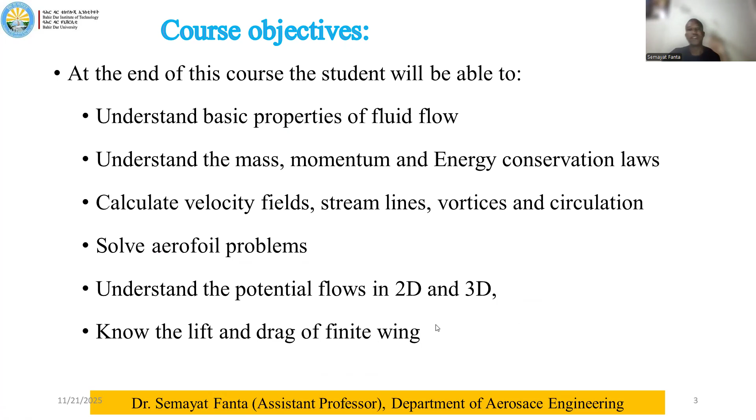The content of the first chapter of this course contains the introductory part, the history of aerodynamics, the aerodynamic force and moments, the aerodynamic coefficients (non-dimensional coefficients of aerodynamic force and moment), the pressure center, the aerodynamic center, and the governing differential equations for continuity, momentum, and energy. On that, the Euler equations and the Navier-Stokes equations will be discussed.

Also covered: the streakline, streamline, and pathlines of the flow, angular velocity, vorticity, and strain, circulation, stream function, velocity potential, the relation between the stream function and the velocity potential, the pressure and velocity distribution on bodies, various aerodynamic properties, and pressure, density, velocity, and the Mach number or sound speed, which are part of this discussion.

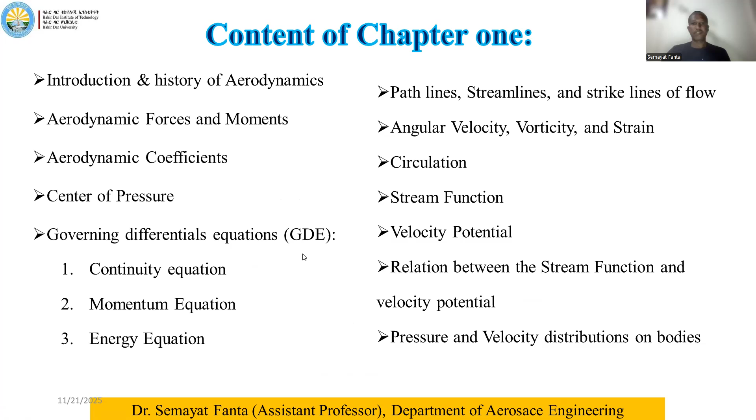So let's directly start from the definition of aerodynamics. Aerodynamics is the study of motion of air and the force acting on bodies moving through the air. These bodies moving through the air may be an aircraft, a missile, or a rocket, or racing cars and others.

It is just a study of the behavior of air as it interacts with solid objects such as an airplane wing, a car, or buildings. So aerodynamics is a branch of science and engineering that deals with the study of how gas particles, particularly air, interact with moving objects.

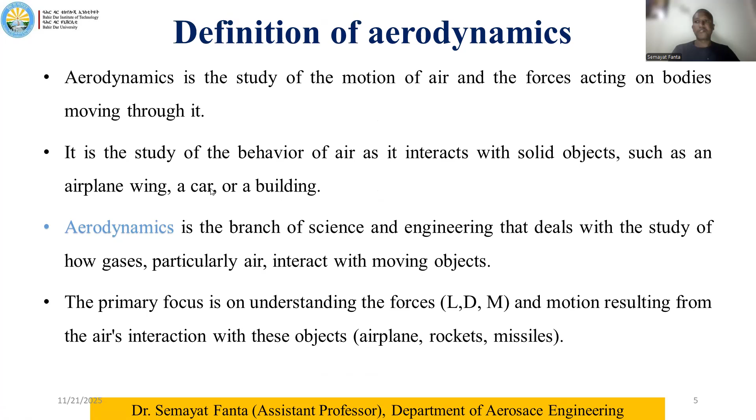The primary focus is understanding forces like lift, drag, moment, aerodynamic force, and the motion resulting from air interacting with these objects like airplane, rocket, missile. Because of that, aerodynamics plays a crucial role in the design and performance analysis of aircraft and automotives.

The fundamental concept in aerodynamics is just airflow. When an aircraft moves through air, it experiences the effect of fluid motion. This interaction between the aircraft and the air generates force that affects the aircraft's motion.

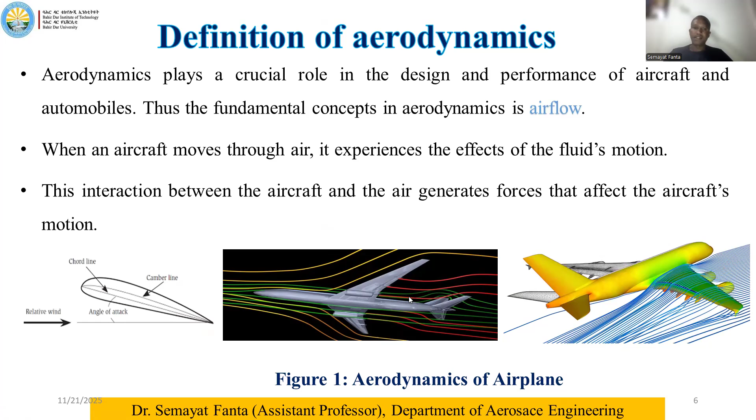From Figure 1, what you can see is the interaction between the moving fluid, the aircraft which moves through the air, and how the air interacts with the aircraft wing. This is a CFD simulation showing how the air interacts with the aircraft. So aerodynamics are generally concerned with one or more of the following.

One is external flow aerodynamics, and another is internal flow aerodynamics. In the case of external flow over a body, it is the prediction of force, moments, and heat transfer on objects moving through fluid, the fluid being air here. That is the state of external flow over the body.

Another one is internal flow through the body: the determination of fluid flow characteristics within ducts or within enclosed passages. That is called the state of internal flow through the body.

The dynamics of both liquid and gas are studied under the general topic called fluid dynamics. So fluid dynamics is subdivided into hydrodynamics, gas dynamics, and aerodynamics. Our main concern is on aerodynamics, that is the flow of air.

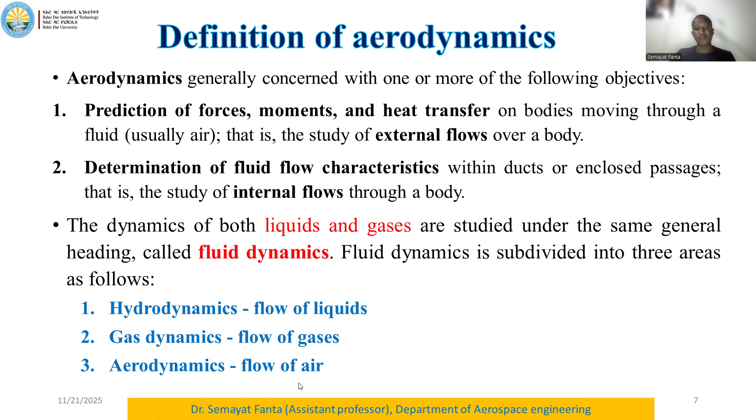Basic principles of aerodynamics are the fundamental principles derived from the laws of fluid mechanics and thermodynamics. These principles help explain how lift, drag, and other aerodynamic forces are generated and how air behaves around moving objects such as aircraft, vehicles, or projectiles.

The basic principles are the principle of continuity or conservation of mass, Bernoulli's principle or conservation of energy, and Newton's second law or conservation of momentum. These three are the basic backbone of the study of aerodynamics.

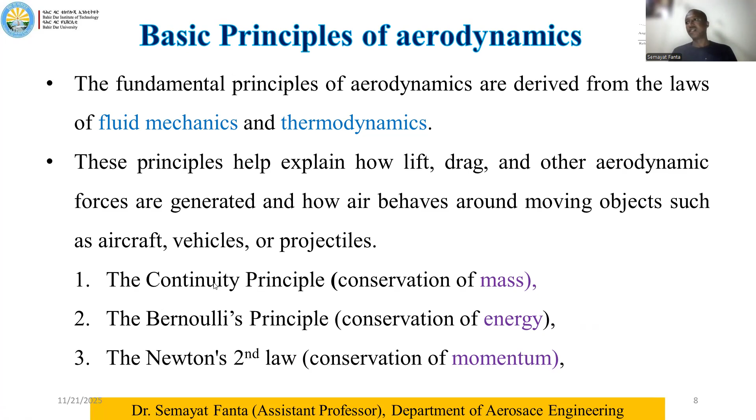We will derive the formula for each case, in the case of incompressible flow as well as in the case of compressible flow. But in the first part of aerodynamics, the compressibility of the fluid is not considered, so our fluid is incompressible fluid.

So when we come to the continuity equation or principle, it is based on the law of conservation of mass. It states that for a steady flow, the mass flow rate of air must remain constant from one cross-section of a stream tube to another. So the mass flow rate, dm over dt, which is equal to rho AV, is constant. On the stream tube, we can observe the flow from one point to another, which is considered constant, where rho is density, A is the cross-sectional area, and V is the flow velocity.

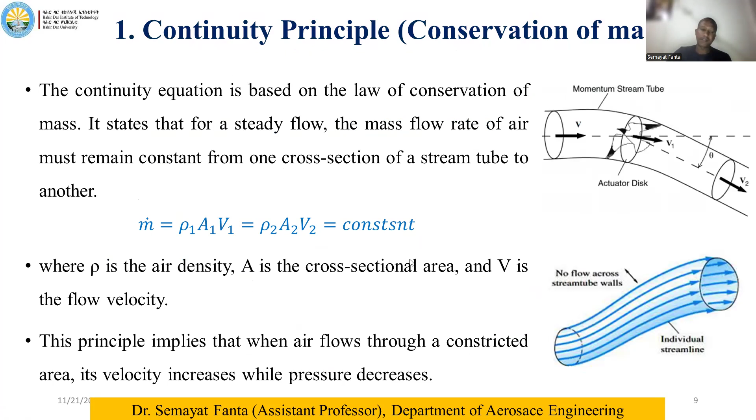This principle implies that when air flows through a constricted area, its velocity increases while pressure decreases. This is called the conservation of mass, or mass flow principle. The second principle is Bernoulli's principle, which expresses the relation between the pressure, velocity, and the height or elevation in an inviscid incompressible flow.

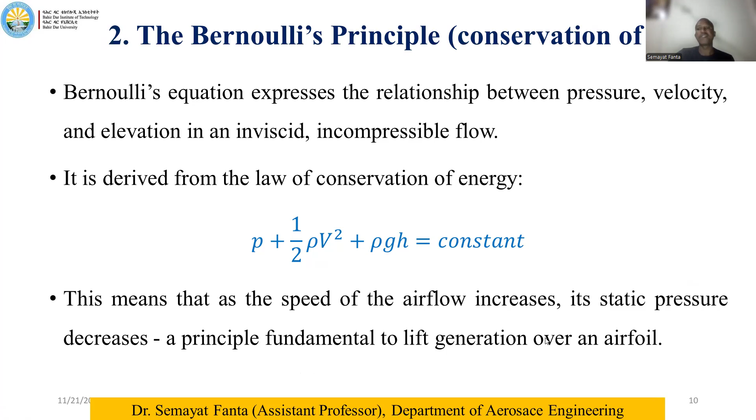It is derived from the law of conservation of energy, that is, the pressure energy plus kinetic energy plus the potential energy is considered constant. So P plus half rho V square, where half rho V square is dynamic pressure, and rho GH is the potential pressure, which is considered constant. This means that as the speed of the airflow increases, its static pressure decreases. This principle is fundamental to lift generation over an airfoil. So this is the explanation of Bernoulli's principle, or energy principle.

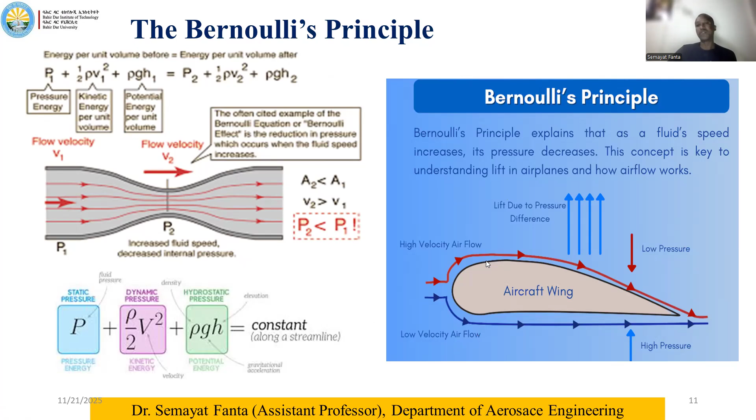So in Bernoulli's principle, it explains that as fluid speed increases, its pressure decreases. This concept is key to understanding lift in airplanes and how airflow works. So this is the lift generation: there is high velocity airflow at the top of the aerofoil and low velocity airflow at the bottom. Consequently, high pressure develops at the bottom and low pressure develops at the top, so that the differential pressure helps lift the aerofoil upward. That is Bernoulli's principle.

Newton's three laws are also an important component for the study of aerodynamics. The first law states that a body remains at rest or in uniform motion unless acted upon by an external force. This represents two important equations: one is an object at rest, that means a static condition, and the other case is uniform motion, which indicates that the velocity is constant, that the rate of change of velocity is zero, meaning acceleration is zero. So static and dynamic equilibrium conditions.

The second law is that the force on a body is equal to the rate of change of its momentum, that F equals dmv over dt. F is equal to mass times acceleration, so the force F is equal to dmv over dt form of equation. Aerodynamic forces such as lift and drag arise due to the pressure and shear stress distribution on the surface of the body, which are helpful in the analysis.

The third case is the action and reaction law. For every action, there is an equal and opposite reaction, equal in magnitude and opposite in direction. So the lift produced is as the air is deflected downward by the wing, resulting in an upward reaction force. The downwash and the lift creation are opposite. That is the third law principle, which is related to lift.

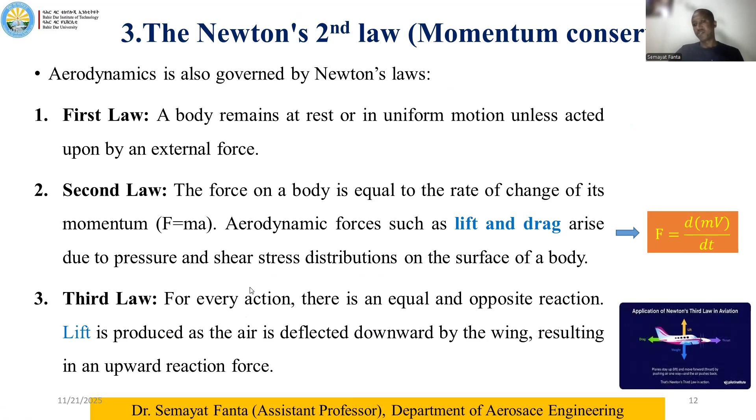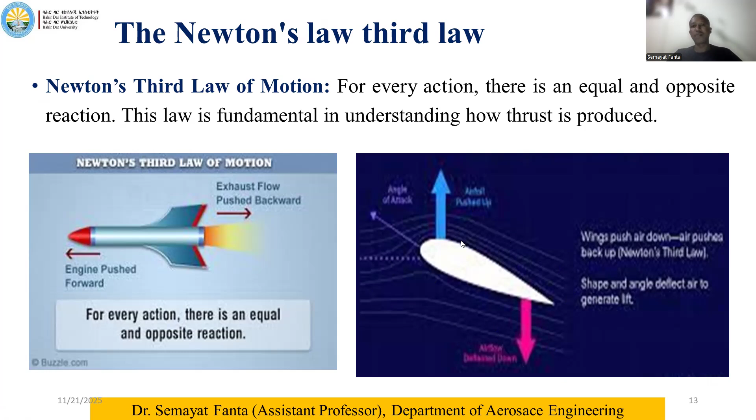Here also, the deflection of moving air downward creates downwash, and that action creates the reaction that moves the object upward. So that is also an opposite force.

Viscosity and boundary layer theory are also an important part of aerodynamics. Viscosity is the fundamental property of fluid that describes its internal resistance to flow or deformation. Due to the presence of viscosity, shear force distribution happens on the aerofoil. Viscosity measures how easily one layer of fluid slides over another. When a fluid flows, adjacent layers move at different velocities, creating a velocity gradient.

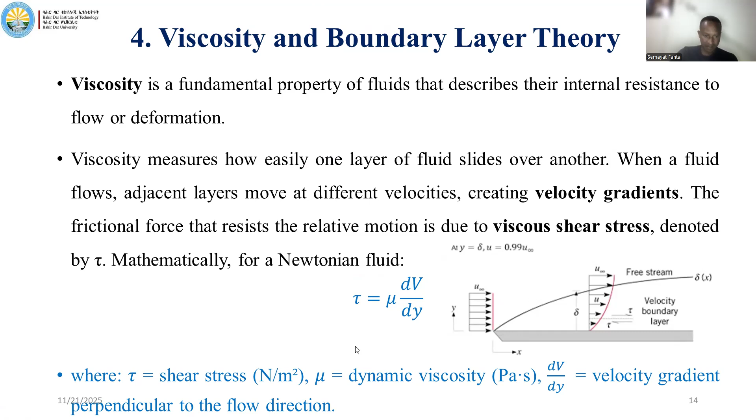One of the fluid layers is considered stationary, and the top is considered movable. From that, we can get the shear force. The velocity gradient perpendicular to the flow direction is given by dv/dy.

Viscosity arises from molecular interaction within the fluid. For gas, viscosity increases with temperature because of rising molecular activity, while for liquid, it decreases with temperature due to reduction in cohesion between molecules.

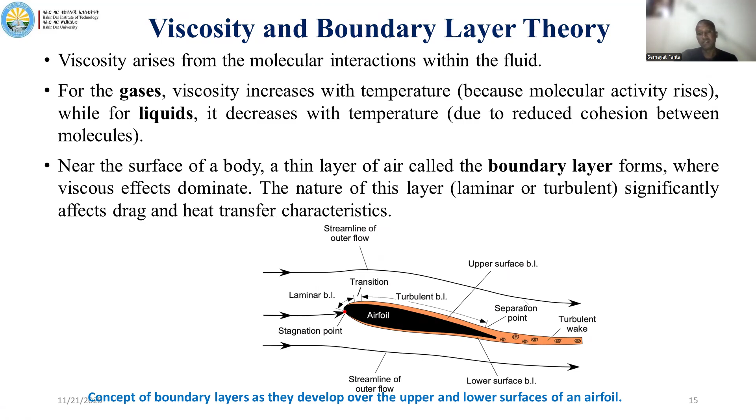This is explaining the boundary layer. The nature of the layer, laminar or turbulent, significantly affects drag and heat transfer characteristics. We have laminar boundary at the initial stage, then a transition somewhere, and then turbulence. At high speed, we can observe a turbulent wake, which contributes to flow separation over the aerofoil.

Now that we've discussed these issues, let's come to the four fundamental forces of flight. In aircraft flight, we encounter four important forces. One is lift, which suspends an aircraft in the vertical upward direction. Another is drag, which is the resistance or opposite force to forward motion. Thrust is the force that enables an aircraft's forward movement, propelling the object forward. And weight is the resistance due to gravitational attraction, which acts through the center of gravity of an object. These are the four forces.

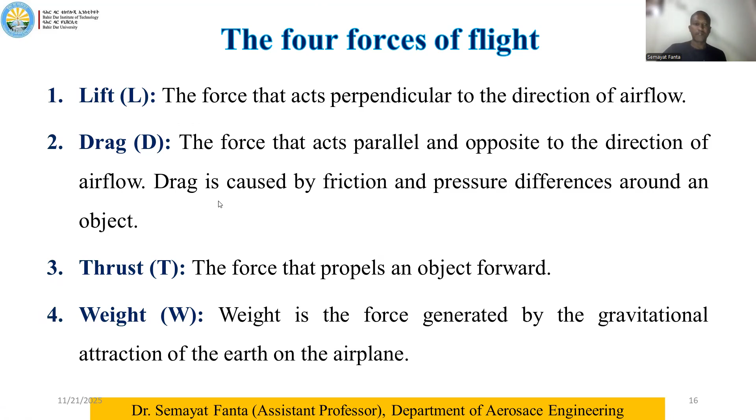The aerodynamic forces are lift and drag, which are important aerodynamic forces. Thrust is the engine force produced from the engine, and weight is the summation of the component acting downward. So these are the four forces.

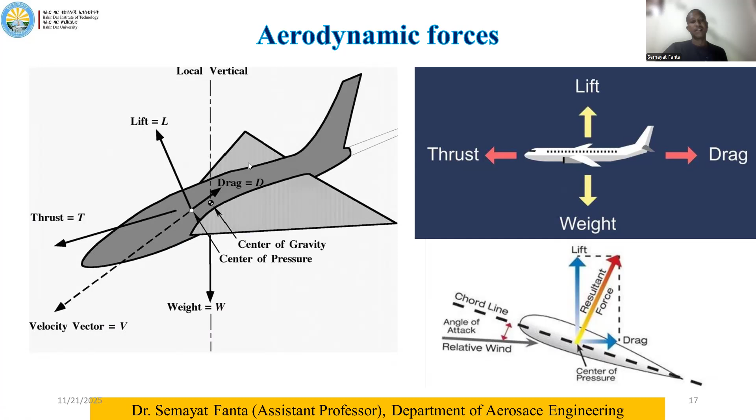Lift and drag, these aerodynamic forces, act through the center of pressure, but the weight acts through the center of gravity. So weight acts through CG, and lift and drag act through the pressure center. Thrust is in the direction of motion, but the velocity vector and thrust vector may not coincide - it may create some small angle, which will contribute to the performance equations of the force summation equation.

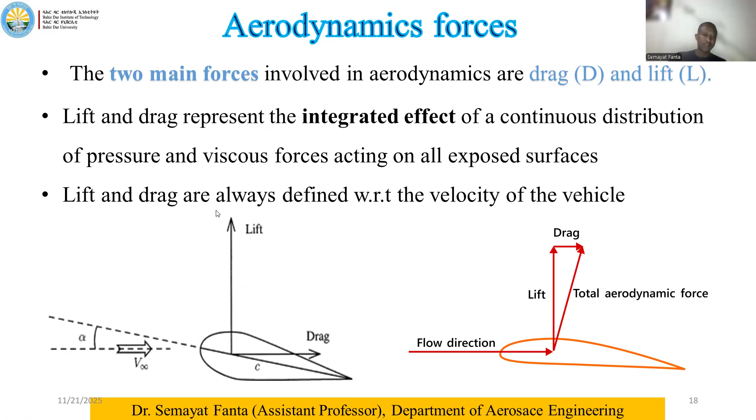The two main aerodynamic forces are the drag force and the lift force. Lift and drag are the integrated effect of continuous distribution of pressure and viscous force acting on all exposed surfaces of the object, and they are always defined with respect to the velocity of the vehicle. So this is the lift, and the drag component is in this direction, giving a total resultant aerodynamic force, which acts through the center of pressure, and drag is opposite to the flow direction.

We can mathematically express lift as half rho v square S CL. Here, rho is the density of air at a given flight altitude, V is the flight velocity, S is the planform area of the wing, and CL is the lift coefficient, the non-dimensional aerodynamic lift coefficient, which we will discuss further.

Lift is an upward force generated by the flow of air over the surface of an object. It is responsible for enabling flight and counteracting the force of gravity. Lift acts perpendicular to the direction of gravity, allowing an object to rise and remain airborne.

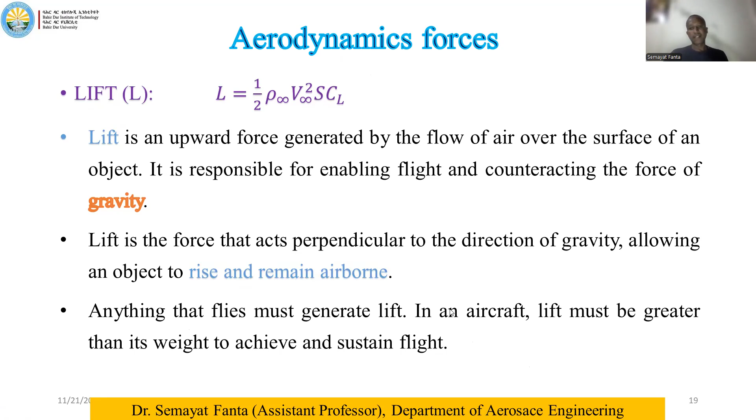Anything that flies must generate lift. In an aircraft, lift must be greater than weight to achieve and sustain flight. At a particular condition, lift equals weight and thrust equals drag; this condition may occur at the maximum altitude where the aircraft is cruising, at constant velocity and constant altitude. But in most cases, this criteria must be satisfied to make the flying object airborne.

Different aircraft use various mechanisms to generate lift, and airplanes rely on the shape of their wings, which are curved on top and flat on the bottom. One type is symmetric aerofoil and another is cambered aerofoil, and cambered aerofoils are intentionally made for this purpose. These shapes cause air to flow faster over the top, creating lower air pressure, and higher pressure underneath, and the resulting pressure difference generates lift, as we have discussed.

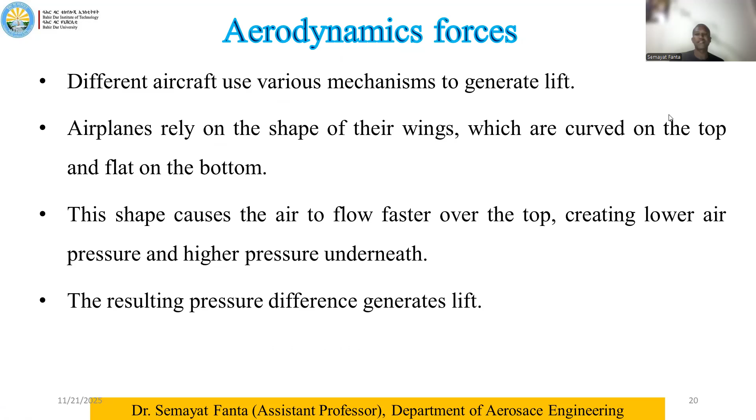The second important aerodynamic force is drag force, expressed as half rho v square S CD. The difference is that here it is CD, the non-dimensional drag coefficient, instead of CL, the non-dimensional lift coefficient. These interact with each other through the drag polar equation: CD equals CD naught plus K CL square, and we will see how they relate to each other.

Drag is the resistance force experienced by an object as it moves through a fluid, acting opposite to the direction of motion and tending to slow the object down. Knowing and minimizing drag is a crucial issue for aeronautical or aerospace engineers and designers. Our main intention is to minimize drag and maximize lift, and for that, a number of design philosophies are required.

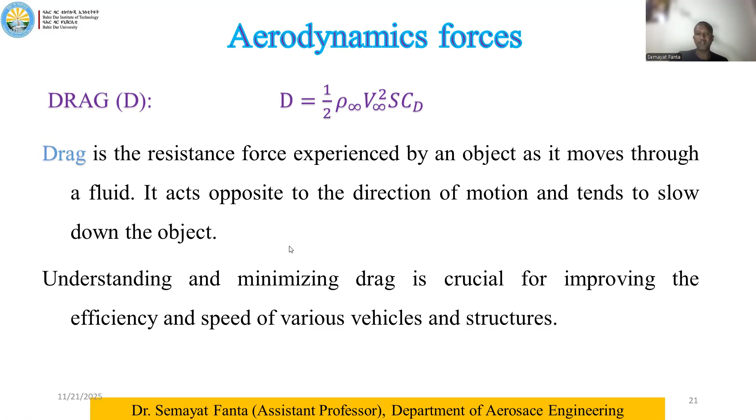These are the various classifications of drag. In the drag polar equation, CD equals CD naught plus K CL square, CD naught is the parasite drag, and K CL square is the induced drag component. The parasite drag is further classified into three types: friction or form drag, interference drag, and wave drag. Wave drag is due to the generation of shock waves, and friction or form drag is further classified into skin friction, pressure drag, and profile drag.

Interference drag is also classified, including interference drag due to intersection geometry, because most aircraft components, like the wing attached to the fuselage, landing gear or undercarriage systems situated in the fuselage, and tail sections attached to the fuselage, create points where components intersect. At these intersection points, we get this intersection geometry drag, or interference drag.

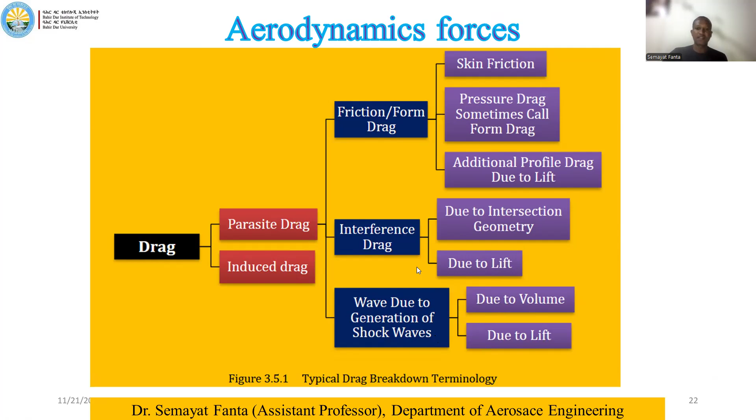Drag due to lift, that is CL square, comes from this point. Wave drag is also categorized into drag due to volume and drag due to lift. So these are some classifications: parasitic drag, CD naught, which includes form drag, skin friction, and interference drag.

Induced drag, also known as lift-induced drag, CDI, is one part of total drag. CDI is equal to K times CL squared, where K is defined as 1 over pi times aspect ratio times Oswald efficiency factor. So CDI equals CL squared over pi, AR, and E.

Aspect ratio itself is defined as the ratio of wingspan squared over wing planform area. So aspect ratio equals B squared over S.

Wave drag is the third type of drag, occurring when an aircraft approaches a speed near Mach 0.82. This is sometimes called the drag divergence Mach number. As the aircraft approaches that speed, shock waves form, and due to that it is called wave drag.

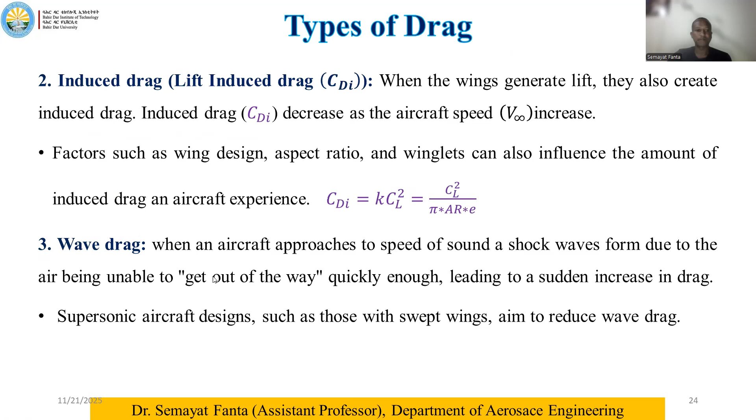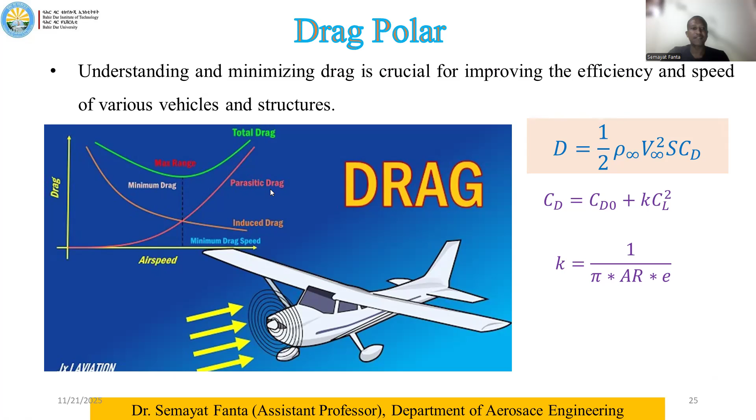The total drag is known as thrust required. So knowing the drag means knowing the thrust required also. To determine the thrust, we have to determine the total drag.

Thrust is another force, from the four forces of flight. Thrust is the force that propels an object forward, and it is the opposite force to drag, necessary to overcome drag and maintain forward motion. In aviation, thrust is generated by a jet engine, or from a propeller, or from various propulsive mechanisms.

Larger aircraft like Boeing and Airbus use jet engines, but smaller aircraft like Bombardier and Cessna may use propellers to propel the aircraft forward. The thrust equation is given mathematically as m-dot times ve, plus (p minus pa) times ae.

The first part of the thrust equation is called the momentum thrust, and the next part is the pressure thrust. The momentum thrust uses m-dot, the rate of mass flow, and ve is the exit velocity. P is exit pressure, pa is atmospheric pressure, and A is exit area. This form of the equation applies for rocket models.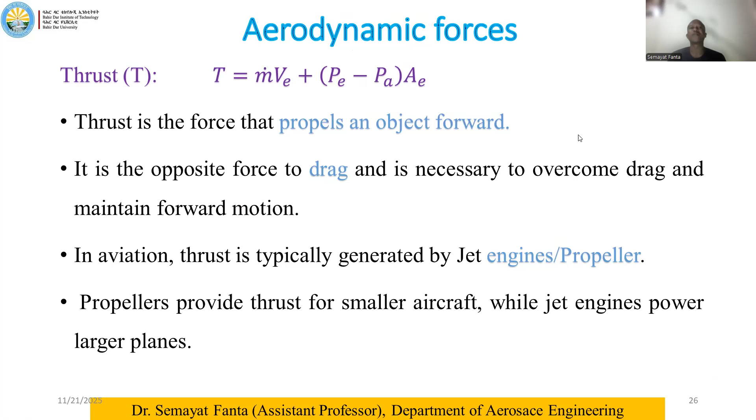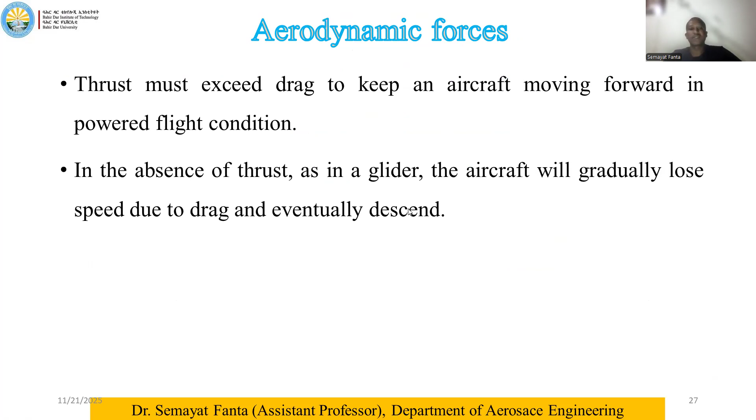Thrust must exceed drag to keep the aircraft moving forward in powered flight, except in the cruising condition. In the absence of thrust, as in a glider, the aircraft will gradually lose speed due to drag and eventually descend. This is the gliding flight condition, or unpowered flight condition.

Weight is the force equal to mass times gravity. Each part of the aircraft has weight and mass, and for some problems it is important to know the distribution, especially for weight and balance purposes. We must know each component of weight: fuel weight, engine weight, wing and body weight, pilot weight, and passenger weight.

These are all summed as the total loads. For total aircraft maneuvering, we only need to be concerned with the total weight and the location of the center of gravity. So CG must be known, along with the total weight W and where it acts, the CG location, for stability and control of the aircraft.

The center of gravity is the average location of the mass of any object. Weight equals the weight of fuselage plus weight of wing plus weight of engine plus weight of pilot plus weight of fuel plus other components. In the case of a fighter aircraft, we also consider the weight of munitions the aircraft carries.

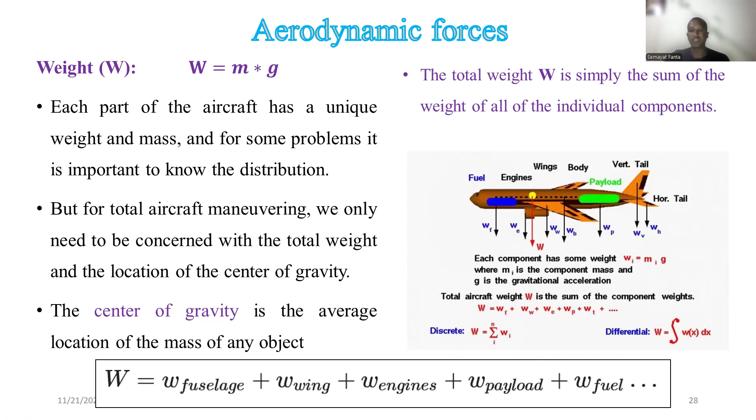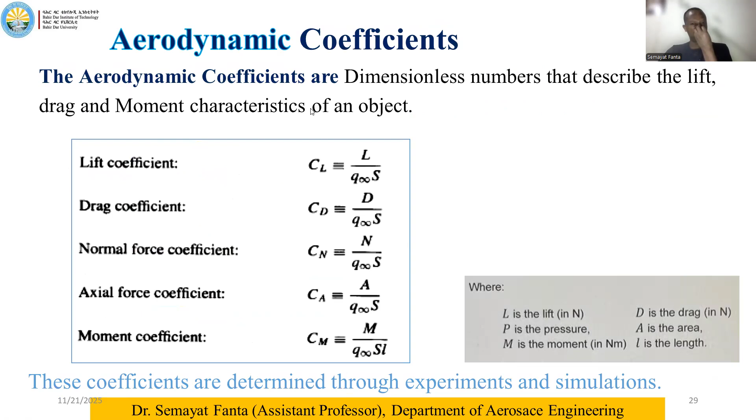So this is for today.